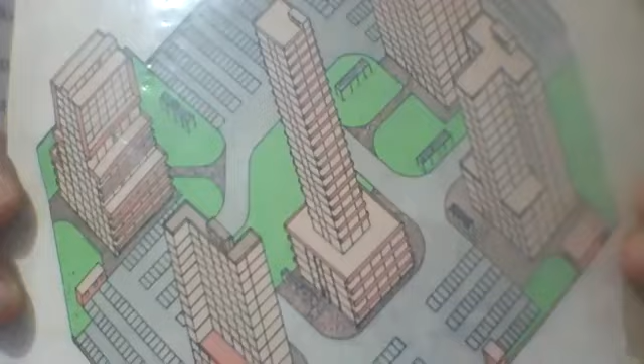13th February 2020, regarding practical engineering, construction engineering, interaction engineering, interactive engineering, coordination engineering, interface engineering, systems engineering in buildings, and all that. This book was published in '96 for the first time. This book is based on practical work which I learned till that year,

1996, when there was nothing, no computers, no major input support, no formal quality system, no formal safety system, but whatever was based on experience in those days was adopted. Well, I'm just trying to inform how that time was, a very easygoing time. I started my career in the Gulf in 1981, and before that I worked in Delhi for 6 years, which period I don't want to reflect because that was not actual engineering, this was just supervision, and nobody used to supervise works properly.

And I learned something with international people, and I feel that if you have to learn, you have to learn yourself. Nobody can teach you. If you're not proactive, if you're not interested, if you're not determined, if you're not dedicated, if you're not devoted, you cannot learn anything. And I also feel that only certificates received from universities do not mean anything until you do work in the field. First you learn in the field and do better, then migrate to designs or somewhere else in office engineering or planning.

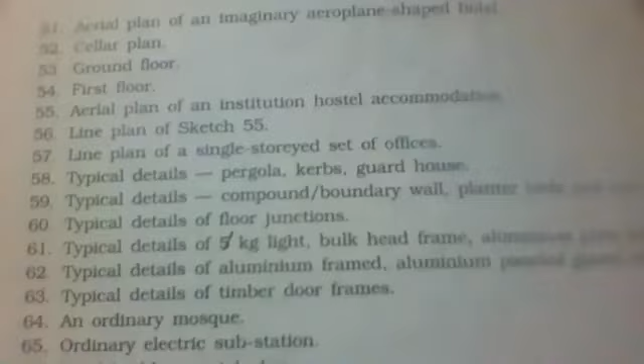It's very small letter. I just give it as aerial plan of imaginary aeroplane shaped hotel or something else. I just taken a first hotel. That's 52 cellar plan, same building, cellar plan, and ground floor, then first floor, aerial plan of an institution building, institution hostel accommodation. This is 55. Then line plan of same, then line plan of single. So I'll first read that and then we'll show further.

51 is aerial plan of an imaginary aeroplane shaped hotel. 52 is cellar plan. 53 is ground floor. 54 is first floor. 55 is aerial plan of an institution hostel accommodation. 56 is line plan of sketch 55. Then 57 is line plan of single story set offices. 58 is typical details pergola, curbs, guardhouse. 59 is typical details compound, boundary wall, planter beds and pits.

60 is typical details of floor junctions. 61 is typical details of light bulkhead frame. Typical details of light, bulkhead details, aluminum patio doors, wardrobe. Then 62 is typical details of aluminum framed, aluminum paneled, glazed window. 63 is typical details of timber door frames. Then 64 is ordinary mosque. 65 is ordinary electric substation.

66 is hotel building area plan. Then 67 is cellar parking for sketch. Then line plan it is. Then 68 is ground parking for sketch. Then 69 is first floor line plan. Then 70 is 2nd floor to 4th floor line plan. 71 is 5th to 14th floor line plan. Then 72 is 15th floor line plan. And 73 is 16th floor line plan. 74 is 17th floor line plan.

So this is a list actually. I just try to show for just a reference, when in confusion. I'll go to the sketches, and I'll show you one bird's eye view, which is a kind of aeroplane. You can see this is a shape only. It's not aeroplane. It's just shape of a building. Just imagine there's a car park also, carport.

You can see this way, or that way, whatever you want. No problem. This is a carport, like a plane. Then here there is one car parking, multi-story one, and connecting internal roads, and swimming pool, etc., and a small substation like a generator room or something.

This is that one. It's a basement plan. A nightclub, etc., was there in basement because it's a hotel or maybe something. This is a cellar plan. Yes, it is cellar plan of same building.

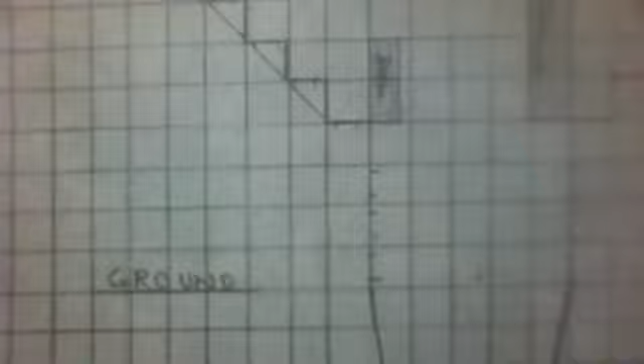Then we go further. It will take some time for me to show you these sketches. I'm directly showing from home, not from my file. This is another floor, written welcome on floor. This is circular. This is ground plan. Now go to the next one, which is first floor. I will show you first floor here.

And it's a different residence building here. It's a building like a pistol. You see, it's like a pistol. I'll show you longitudinally also, so that it's clear to you. That's this way. So this is pistol shaped. Just some specifications are written there.

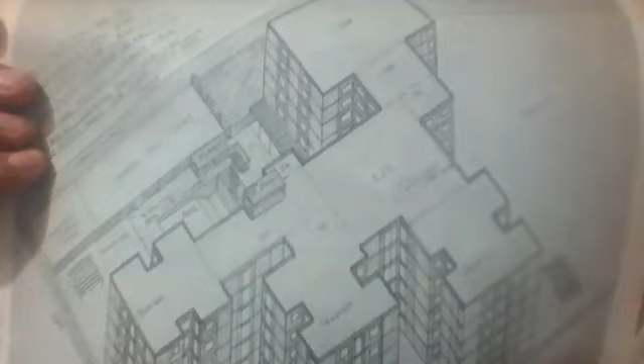Actually, just buildings, multi-story buildings having certain residences, hostel type residences, you will say. And if you see, this is its plan. You can see this one also, whichever is better for you to understand. It's a bachelor accommodation, you can say, or some specific accommodations.

And go further, then it's another accommodation here. You could say it's another kind of accommodation. Or offices, not only accommodation, can be offices as well.

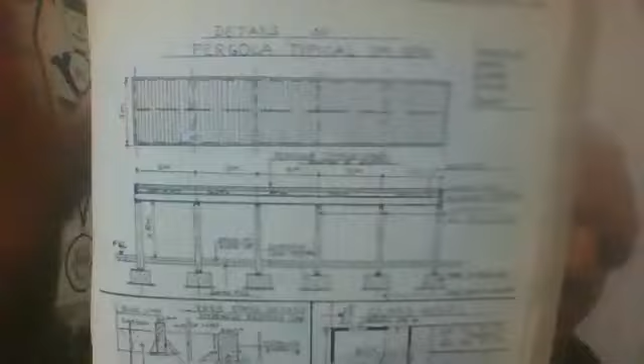We move further. Now I'm going to show certain details of a typical pergola, and certain curb stone, and then a small building, a guardhouse. I'm going to show you this one, small minor details. This is a pergola here. This is the pergola plan on top, and then the elevation and section of that pergola.

And if you see there in cross, there are certain lines which are showing an angle. These slats are fixed so that sun rays go down and shade. It's completely covered at certain times, while at other times it is not. And there's curb stone here. And this is a guardhouse, watchman room.

These details are all practical ones as I learned, and these are drawn simply. Seed soil is written there for fill, and you can see curb stone and block lining and garden there, and then precast curb stone, 49 Newton. And the guardhouse has some kitchen in between, one duty room, one bathroom. I'll go to the next one.

And it is about the compound wall, and some certain plants. The sealant, polysulfide sealant, is shown, and then compressible filler is also there. This is a movement joint in that wall panel, 15 meters long. There are some other details you can read. Compound wall or vertical wall.

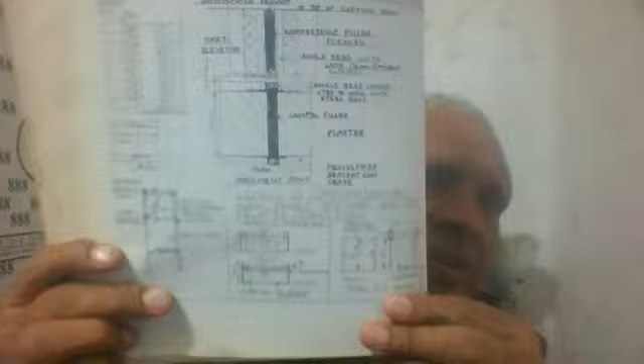You want to go further? I'll just do some references. I'm going to show you floor junctions. What are floor junctions actually? Carpet floor one side and different floor other side on the slab. There's terrazzo tile, and then terrazzo tiles on one side and epoxy floor on the other side. This is how we fix junctions.

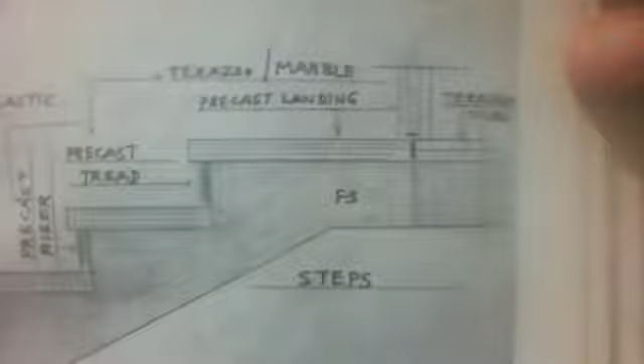So this is terrazzo tiles on one side and timber floor on the other side, and same way timber and carpet. Similarly, marble, terrazzo, marble, ceramic, and mat well. We call them floor junctions, where two different finishes of floors meet. How to design that? It means there's no continuation of the same flooring.

Rubber, PVC, same way. Marble terrazzo and precast terrazzo, and floor junctions is the title of this page. Steps, entry steps. These are called standard details in project drawings, standard details for that project, which are repeatable. This can be repeated anywhere.

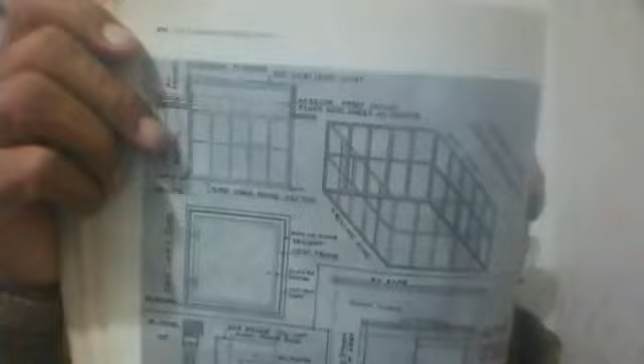And I'm going to show you a bulkhead used for a skylight, and also a patio door and wardrobe. Three details are there. This is a steel frame bulkhead finished with certain sheeting, fixed below the skylight. This is the skylight position, roof slab with a cutout, on which the skylight rests, receiving sunlight into the air conditioned area. And this is the hanging bulkhead fixed to the slab.

This is the isometric of the bulkhead here. This is a plan also, skylight location plan. Light frame is written here. And this is the skylight plan, skylight elevation and section, and isometric of framing of the skylight.

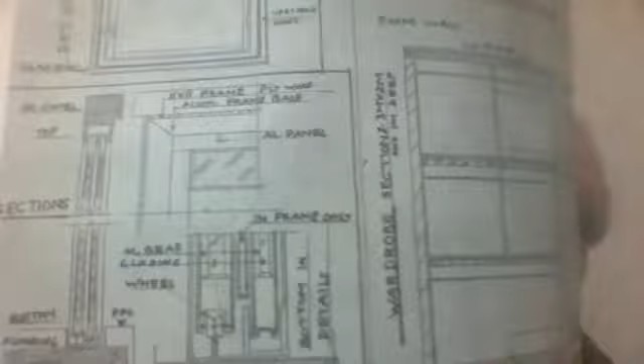And this side is wardrobe details. RCC slab with block walls, like a cupboard. And this is aluminum door framing, extruded type of door sections. I'll go further now onto details of aluminum framed, aluminum panel glazed windows. I'll show that one now.

You see my fingers also get in the way because of obstruction, but no problem. What to do? I hold it now. I cannot hold otherwise. This is patio door, aluminum patio. These are details of patio door, and this is a hanger, and this is aluminum specialist details, wardrobe details, and this is, you can say, double lower one. Typical details of aluminum framed, aluminum paneled glazed window.

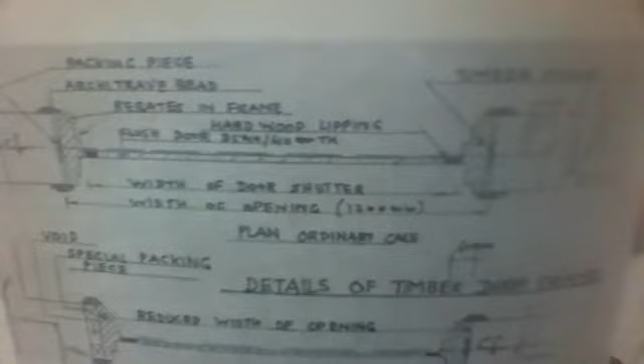This book is actually meant for sketches and field work. I'll show you now timber door frames and relevant details for that. Elevation, you can see elevation of door, frame, and all required written. Fixing details are also written here.

See, section of framing. I mean, what we do here is different. You can see this one. The rebates are here. Framing. Full frame covering wall, and this architrave as well. Though timber is very expensive these days, but this was old. You think what happened in 1986, 85, 89, like that.

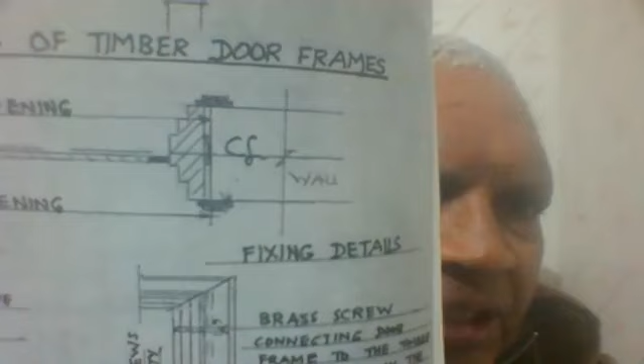You can see a gap between wall and frame section. That's subframe, we call that. This is frame where you have rebates, and the subframe behind, in the middle of your gap. That is generally plywood. Old used plywood could be.

So we go further. I'll show you a plan of a building which was used as a mosque. This was a mihrab of mosque towards location of Makkah, and this was laid on site by Molvi. This was a small mosque. It was a part of school building, and I worked on that. We call Molvi to lay out this direction. And this is all RCC structure.

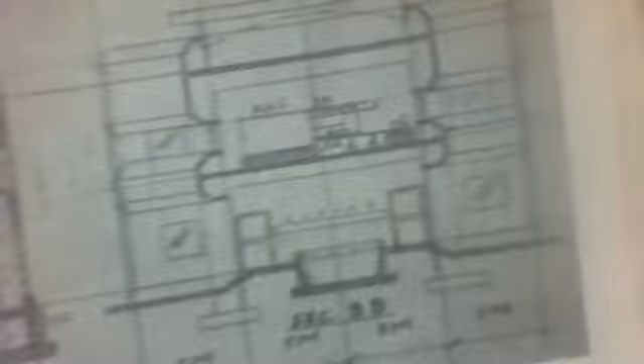This is a section of that mosque, and we just worked on this thoroughly. Ablution area. This is prayer area, and this is cut out in between. There's no floor in that portion. Middle one, balcony type, internal balcony. So this is a mosque. I'll go further now. I'm trying to give as much as possible from engineering viewpoint, not from architectural viewpoint.

Now it's miscellaneous details of, this is, you can say, switch gear, electrical room, transformer, switch gear, transformer area, cable trenches, all that I'm going to show you now. This is area, transformer area, and this is your transformer room. Plinth is shown there, and cable trench you can see below.

An entry, and there's a cutout in roof, and there's a parapet, inclined parapet. This transformer is placed on that plinth. You can see that base of transformer there, section A, and above the slab is inclined parapet, and this is your cable trench.

And then we go further down to now this is a bird's eye view of building which can be used for hotel or for hospital or whatever. This was drawn on A4 size paper. You can just imagine how difficult it would have been. Manually drawn by pencil. Hotel, I devised for hotel, this one, and certain parameters are written.

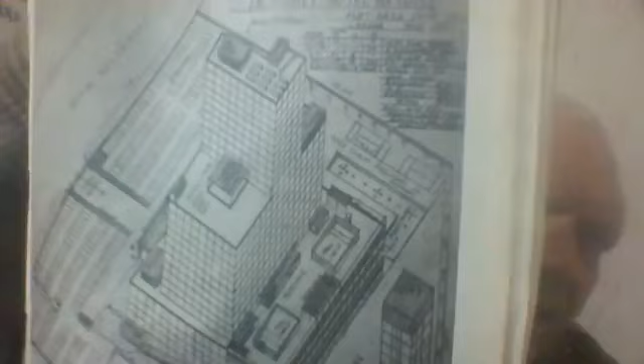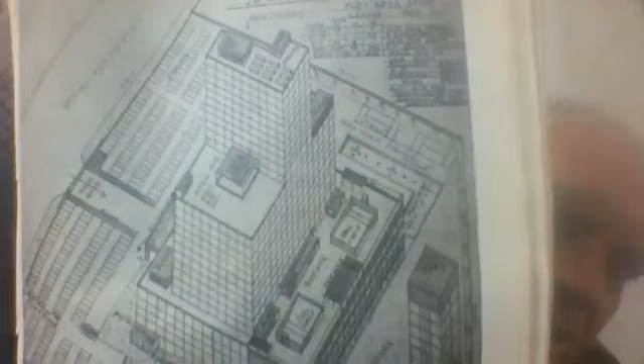Just think of, I'm not an architect, I'm not a draftsman, just thinking how to do it on plain paper using pencil and ballpoint pen. And this was done in 92 or the same time. Just think of, I wasted too much time on this when I had free time, and I used only scale. These pages are tearing out.

I'll show you now. This is cellar area of this one. Cellar parking, location of car parking layout, basement cellar. If you see these lines and roads, a grid is generally 5 meter of columns. You see this ramp here going. I go further than that.

And this is first floor of this, where I've given some entertainment and restaurant, entertainment area and recreation area. This is first floor area. This is, you can say, restaurant here, and this is your entertainment club type area. Club type, it's not actually club.

So further on that, it is 16th floor plan, and this is restaurant, covered one, open one, plant area and open air, etc. Miscellaneous, like how to use that one. So let's go further. And it is 17th to 26th floor tower, real top tower. This is top tower.

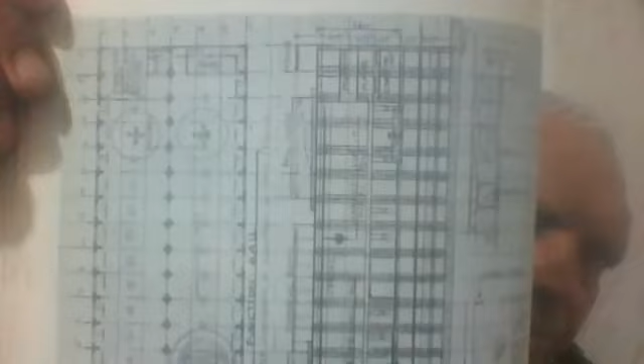And go to the next one now. Now I'll show you this complete detail of a hall in a hotel. This is the detail of that one. Just a little air condition, complicated one. Just see this one. So you must see this one as well.

Sorry. So there's a dancing platform and complete details of ducting.

So I am going to another building, which is a commercial one, and the cover of this book actually is this commercial one. It's the same thing as the cover of this book. This is a cluster of buildings, small buildings around, service and the small buildings, and this is the main one. This building, I'll go to details of this one.

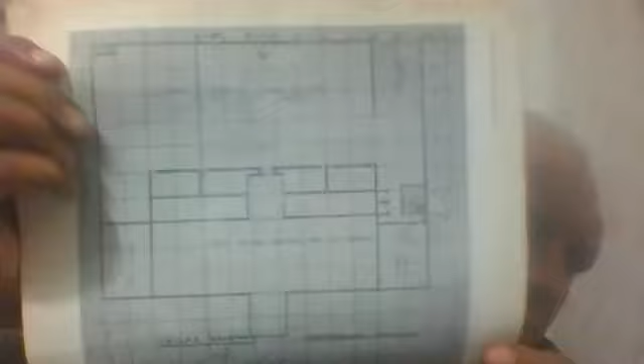Oh, this is cellar, basement cellar. This is cellar. Same building. And then move further to this other one, and this is ground. And move further down. This is commercial. This is first to fifth floor. First to fifth floor.

Then hold on. And this next one is sixth to 13th floor. And this you can see. Now I'll move to the other one, that is first to fifth floor. Then this is over. So I'll go to the next page.

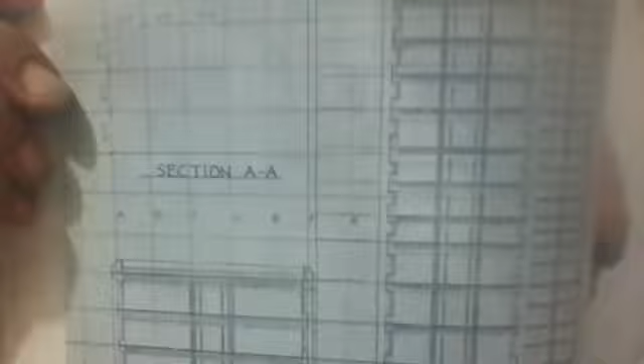This is some elevations, I think, elevations or sections. Yes, this is section. First of all, let me give you section. Section AA. You can see raft in section as well as structural cuts. This is actually structural piling shown below. You can see that. And this side glazing is also shown. A little bit of portion is elevation.

And now elevation, you see one of these, elevation A, you will see glasses and other areas of this tower as well as lower tower. And then I'm going further to the elevation. This is B, elevation B.

And then further to elevation C. So glazing and other areas are showing. And then we are going to the further one. This is elevation D, means all four sides are four elevations. This is a good building, it's a big building actually.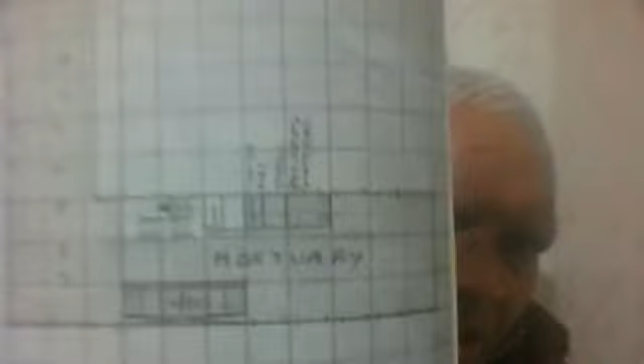This is mortuary here, and some other areas are there. Go to then research, etc. Go to the typical outpatient department. Four floors now, typical four floors there. OPD typical.

This is gynecology, and various other departments are there. We go to surgical operation theaters. This is a surgical operation theaters. OT, OT, OT.

Go down to ward, wards, 10 floors, ward area. Typical design on all swastik ends.

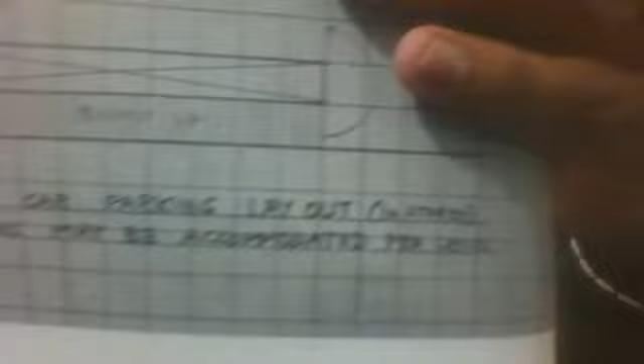And I'm showing you, this is a car parking layout of a building. It's not a hospital, some others. This is a building car park, you may call it a carport. So notice you can see this carport. There we go. Further details of this.

Symmetrical plan. It's a framing of the car park and locations of car park or circulation area. Various sections of this are required because this is here. We go further then. Also sections of this car park.

And then we go further, we'll find another ramp and surroundings of that. Ramps and surrounding car park. Now there's another one, a small complex. Small one. 786 shape. Car parking as well. And the details of this, we'll find this one.

I go further then. Another detail of this is on the next page. This is another building. This is a cruciform shape. So office type or commercial type. And these details are here. High rise. Further.

Now I'm going to show you a gymnasium. Sports complex. Sports gymnasium, small, a part of some training unit of the army. Sports hall. And moving on further towards detailing.

This is a shed, stadium shed, an indoor stadium actually. This is not an external stadium, a small building for staff. In the middle there is RCC, and the top is structural framing. It was a conversion from an existing building to a stadium. And go to some detailing of this building.

Typical detailing of foundations. Combined foundations mean a combination of RCC and structural frame column extension resting on the same footing, having an RCC column and a structural steel column. Combination of two. These are sections. This is the same footing with sections of this one.

Various miscellaneous details. This building will go to further more details of the same: certain steps, certain sections, certain rooms, and one squash court is also there inside with timber flooring, and this is the same with many details of flooring and others. And we'll go to further details of this building.

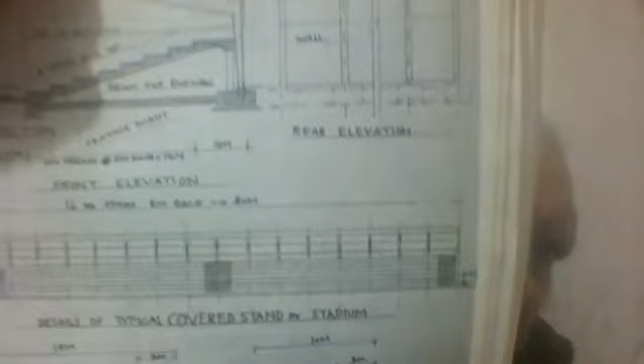It's a portion of the stadium and unsupported. We'll go further then. There's a further one, this stadium, Kabaddi stadium, same one. Seating, and there's also seating here. And this is a covered stadium. This is here. This area, section of stadium.

Let's go further on that. Showers and changing room, lockers, and some other sections which are going to typical details. Changing room here, locker locations, changing room, lockers are required also. Then complete details of reception counter, etc.

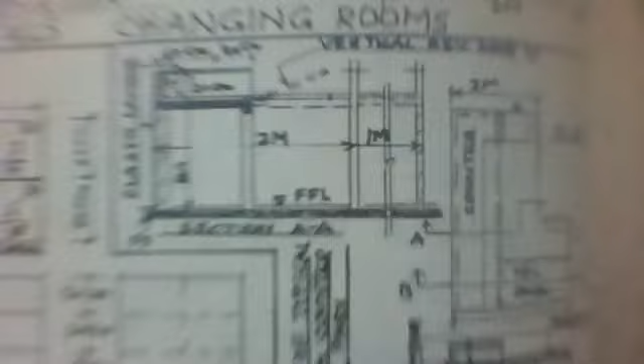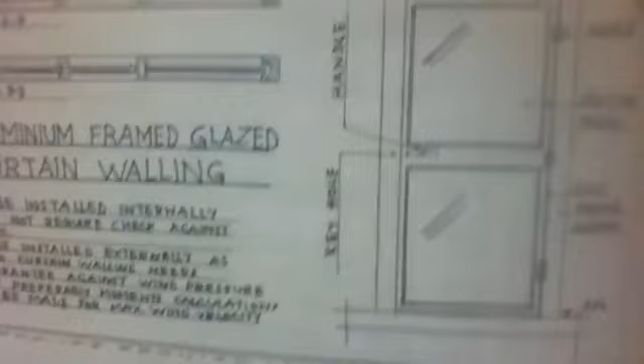And go then to timber framing, timber frame backing. And further, this is your aluminum door. This is aluminum door, aluminum window. Glazing and details.

Now I'm going to show an educational building, like an education complex. It may be a university, a college, or something. We have various locations or layouts for information only. Various buildings are shown. Not necessary that you read this.

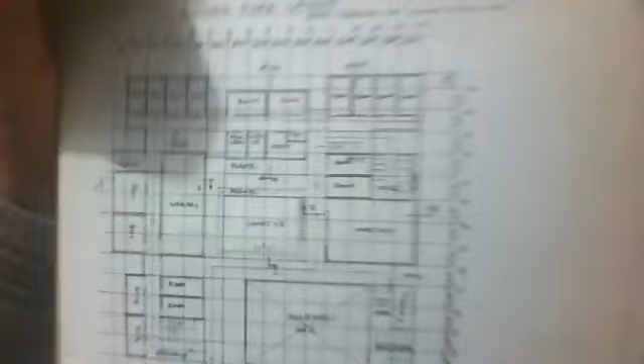Okay, then I'll take you to further details. These are further compartments of this grid plan. A, B, C, 1, 2, 3, etc. Grid plan. This is the given grid plan. We have to move to the ground floor layout of this.

The first floor of this building. It's a group of buildings. This is the assembly hall, and this is the workshop. There's a classroom to the side or something like that. We'll move further to the roof layout of this.

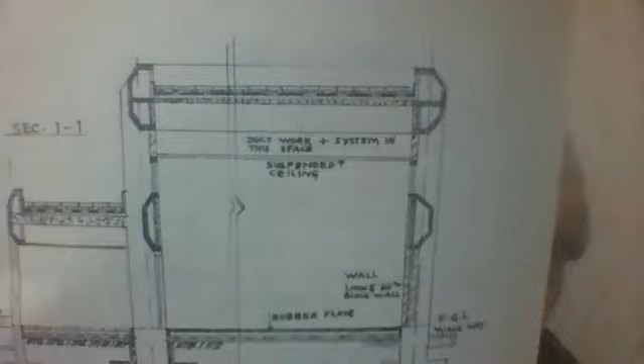So move further over there. This is a foundation and section of the building. You can see RCC structure, roofing, and this is footing, waterproofing, footing. And there is again another one.

Then there is a detail of ceiling with air gap. The ceiling details. Suspended ceiling.

Other details of flooring and the same sections of classrooms. You can see the same roof slab. Roofing details here, upside down roof. You can see these details of roofing here: RCC, on that is complete roofing, including aluminum skirting and sealants.

The building section here. You can see first ground floor and then first floor. RCC column, RCC fascia, and roofing. And then further, I'll change this one over. I'll go to the next one.

And this is shooting range, firing range, 330 meters long. This is the main hall of the firing range. This is outside here, like we see the orientation like this, just for clear construction. It's continuation. You see this one, first one, then this one in continuation, and then this one continuation. So this is shooting range 330 meters long.

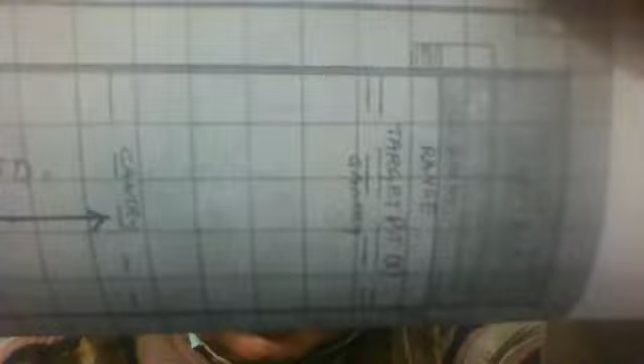And these are 3 underground target pits, target houses, and then the connection of that. This is in continuation, first grade on ground, and then further continuation. So here, this is a bullet trap chamber. This is target pit here, and it's complete grade slope. Then also here, same, and the baffle walls in between, and main walls are here. See 2 thick lines.

I'll show you details if I have them. I have details of this. Yes, I must have. Now I'll show you something here. I'll see how I can show you. I think I need your selection. It is not there. Yeah, it's here.

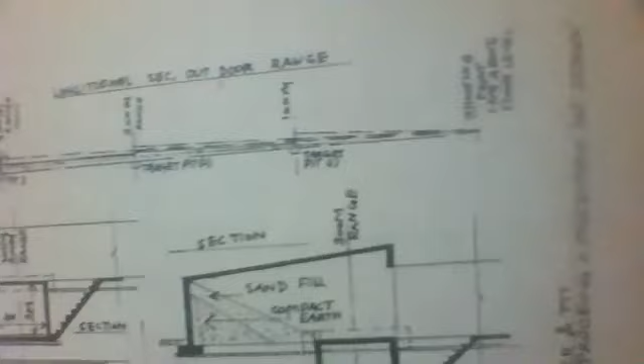You see this? This is what it's about. This is the layout of this: longitudinal section, outdoor range, and this is your bullet trap here, 330 meters from building one. The pits are shown, and the direction of bullet is shown. Then the bullet trap chamber is shown here.

You see, this is a very long, 330 meters long shooting range, firing range. At one end building one, which controls, and at the other end this bullet trap chamber. In between is the 330 meter distance with RCC walls on both sides, and there are three gantries in between to control. Then there are corbels just under these gantries, and the bullet routes below. There are target pits below, three pits, and the sand fill in the trap chamber.

So you can see details of the target pit underground. This is one. You can see steps are there. So that's the firing range, shooting range. Now go further. I'll show you further details, one more page, and this is very important. I'll show you the gantry and armor plate, and also sections of both.

Now this is a cross section of this gantry. This is a structural steel gantry, and it's resting on a corbel. Here, this is the RCC corbel, and then this baffle wall here, RCC wall, with foundation shown, and there are other details. These are armored plates fixed on that gantry, and the entrance down section is shown. So this is another detail of the same firing and shooting range.

And further, this is a small standby powerhouse, diesel generator powerhouse. This was located in Libya, Sirte town. This is the section of that. You see the alternator base is there and the generator base is there. Mass foundations, these are massive blocks. And there is a gantry on that, a crab is moving on that.

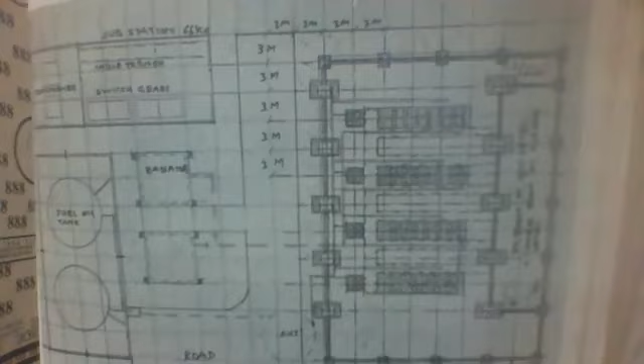And this is the plan of that building. There are 4 generators shown, 2500 kVA, and there's the alternator on this side. This is your generator, and this is your alternator. These are all structural framing of the buildings on foundations, and these are fuel oil tanks here, and various other equipment locations, the sections of the building.

Fuel tank and layout of the 4 x 2500 kVA diesel power station. This is the radiator foundation unit, front. This is fuel. This is the power station. Further, the pages are sticking to each other.

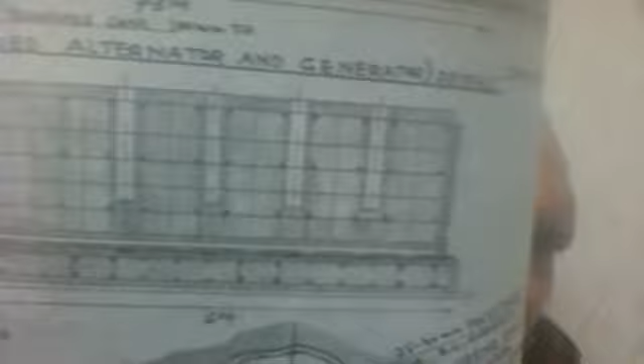And you can see the isolation between this foundation and the raft of this foundation. The alternator is connected to RCC, but this generator is not connected to RCC. There is an isolation gap. A steel frame is there and complete details of the polystyrene are there, and the generator is not resting directly on the footing on the raft, but on that isolation.

So just to absorb shocks, and this is the detailing of that work, neoprene, etc. Neoprene was in. This is a French design. This was designed by a French company. I used personal attention to carry out this job. This is the combined alternator and generator footing, foundation base, and these are all pockets shown for bolts.

This is, you can say, the trench, where isolation, polyethylene membrane, neoprene, polystyrene, all are shown here. You must realize how difficult this work is sometimes. You have to know each and every detail. It's not simply a structure. It's a complete one. See, details are given here, what we did on that.

Then I'll show you further the framing we did on that. How is the framing of the isolation? This is the framing. Mild steel frame for the isolation. This was placed, you can say, above the raft, and if you can see, this is the raft. This is the detail. Mild steel plate is shown.

Below that, the structure is shown, the isolation structure, and there's neoprene, steel-supported neoprene plates, and then polystyrene in between, and on that you have this dark color. And MS flats are there for connection. You see this?

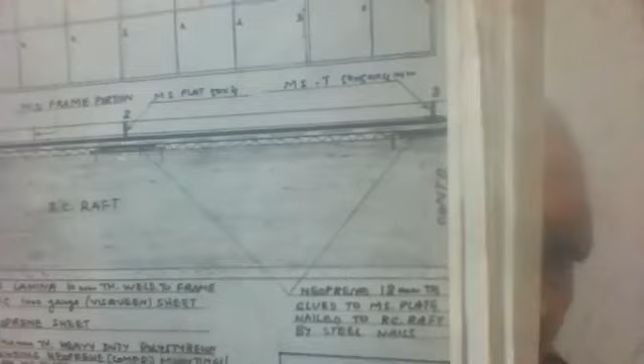This is the details of that. I'll show you small things as well. Small footings for this building. This is for structural basis. So neoprene on steel plates, and then polystyrene in between, and on that there is a membrane, and on that is your steel framing.

Now I will give you another detail of this. This is regarding the gantry and crane for the same power station. In that shed which I showed to you, this arrangement is for an electrically operated one. This is here, and this is your fuel oil tank.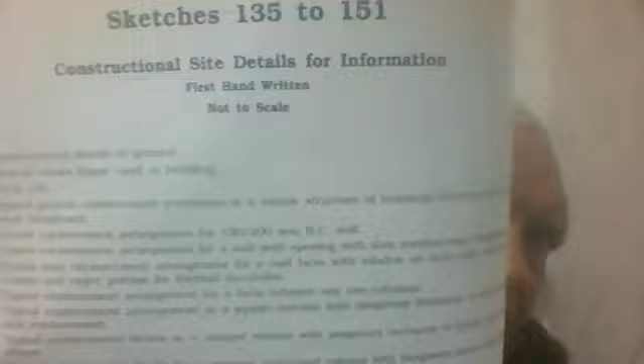Sketches 135 to 151. Construction site details for information. And this is all. I'll speak to you about these. You may not be able to read, but I'll read the problem for you.

Constructional details in general. General rebar shapes used in buildings, and typical general reinforcement provisions and simple structures of buildings from a practical viewpoint, which is imaginary. Typical reinforcement arrangement for 150 to 200 mm RCC wall. Typical reinforcement arrangement for wall with opening with slab reinforcement, imaginary.

Typical steel reinforcement arrangement for a wall fascia with windows on both ends with RC column and upper portion for thermal insulation. And typical reinforcement arrangement for a fascia between any two columns. Then typical reinforcement arrangement in a square column with imaginary inclusion of beam. And typical reinforcement details in plus-shaped column with imaginary inclusion of beams.

Then typical reinforcement details for a proposed pentagonal column with imaginary beams, and typical details of arrangement of rebar in hexagonal columns and in octagonal columns and stanchions, and combined footings, and column flush with footing edge, and typical rebar for lift wall. I'll show you all this one by one.

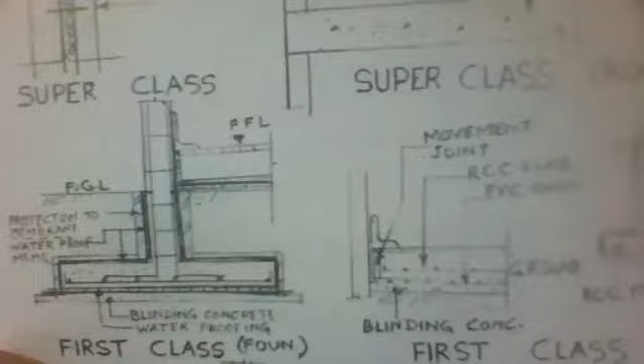Finished ground level and how steel and how waterproofing is done. Protection, actually, I call it. I don't call it waterproofing because we have to protect the concrete surface from the impact of soil chemicals. That is actually required. We call it waterproofing, no problem. And there's a blinding concrete. There's a waterproofing wall. You call it waterproofing, stop columns there.

And there's a roofing detail here. And there's some other detail: wall ties, cavity walls. Cavity wall, skin outside, skin inside, and then the cavity with polyester in between for insulation purpose, and wall ties, and this is wall cavities up there.

And this roofing, you can say inverted system, which is RCC slab, then fill. This is mortar fill, mortar screed fill with a gradient of 1.25 to 1.5% of length. Then there's waterproofing, roof proofing treatment, and then polystyrene insulation, and tiling on this waterproofing, roof tiles, if it's accessible.

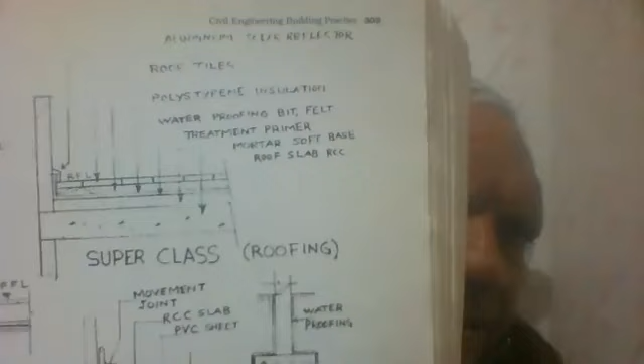If it's not accessible, this is gravel fill. You see this movement joint, RC slab, sheet, and this is waterproofing here and roofing as I just told you, roofing, tiling, etc. And this is your foundation, detail of foundation here as usual. So these are miscellaneous details for purpose of information.

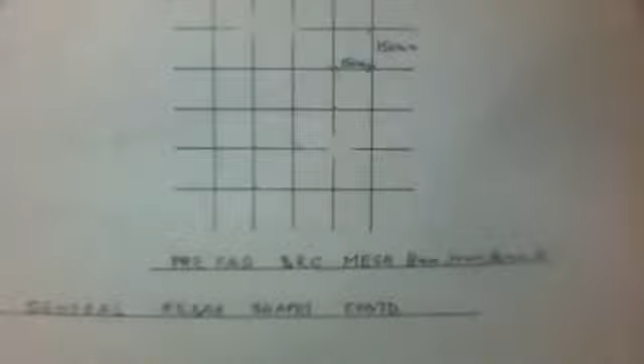And now I move to fabrication of bars. I used to do detailing using BS 4466 at that time, which is now 8666, and their shape codes. You use that or you can use a customized one. It's up to you. It's your efficiency how you do that. But details must be clear to the user, to the engineer on site. That's what's required. How you do that is your headache.

And you will see isometrics. I'll show you something now which is imaginary, those are drawable. Just for information purpose. What is this? You see the foundation here. And then it's imaginary detail of some bars. You can see this. Imaginary, how to arrange bars.

Typical general beam, general rebars, general reinforcement provisions in a simple structure of a building from a practical viewpoint. Further, I'll show you a wall here. There are two columns. This is the wall detail.

Reinforcement detail of wall, and then I'll show you the next one, which is including fascia. It's a very complicated one. Manually drawn, imagine this was drawn manually.

And this was manual, and this is written: typical reinforcement detail of a wall with opening and also added proposed slab reinforcement arrangement. It's a very complex one. So you can't even think now about trying it manually because computers are available now. And computers even won't give this much.

Okay, let's move further. Maybe I'm not doing what you want. This is again, so it's also a column, but cross shape. I'll move to the next one, and this is a five-sided pentagon shape. Next one I go. This is, sorry, this is a hexagonal shape.

Then I move further. That is something else. It's the foundation of a structural steel column, as I showed to you in that power station. This is the base extension, or you can say mast type thing.

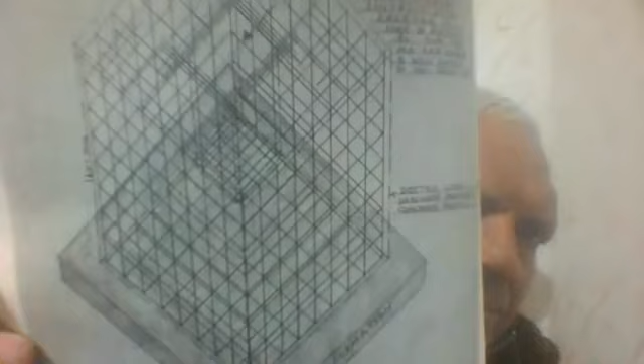Then we'll go to combined footing. Combined footing. This is one column and this is the other column. What columns are these? This is combined footing, and then combined footing here. We'll go further to the next one.

This is also a big sketch. Lift well. That is the lift. Lift well, you see, a walling of lift. It's one story I show you, walling of lift. We'll go to stairs. Yes, this way, yes. It's a dim one because of some print problem.

Well, the structural work is over. After that, I'll give you many more sketches in a different way. Now, this is what I explained to you. Now I'll go back to my previous one. Yeah, I was talking to you yesterday about... there are so many sketches I'll show you later on, which are based on architectural arrangements.